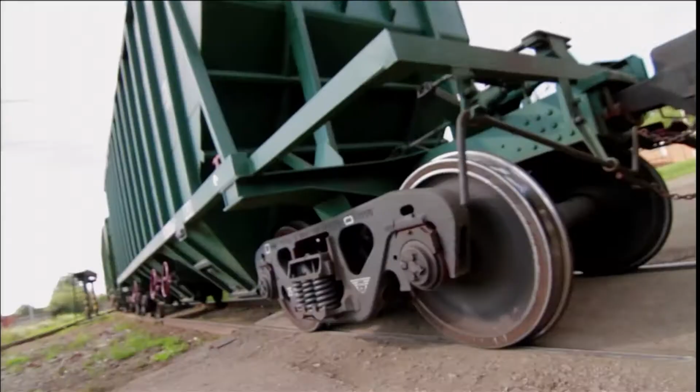Every day, thousands of freight trains wind their way across countries around the world, hauling everything from grain and coal to automobiles and cargo containers. Shipping by rail is one of the most efficient ways of getting goods from here to there, and it's been that way for over 100 years.

But the complexity of getting a train to its destination on time at the lowest cost has always been a challenge. Train length and weight, track conditions, grade, even differences between drivers can all play a big part in the speed and efficiency of freight delivery.

And then there's the constant state of change. A sudden thunderstorm can add tons of extra weight to a mile-long string of open coal cars. In uneven terrain, the lead locomotive on that same train could be cruising down a steep incline while the cars in back are struggling to climb it. In between, a powerful slinky effect of stress can produce enough force to break the train in half.

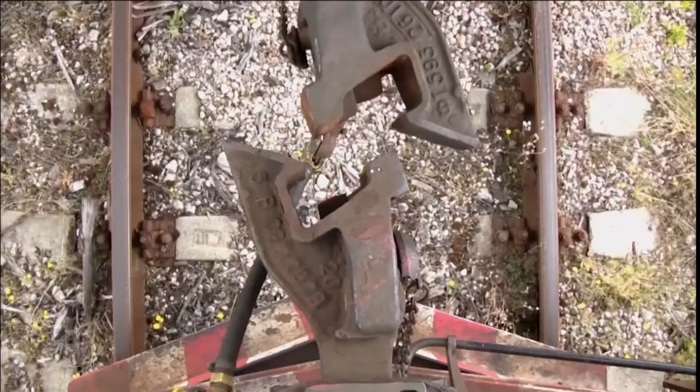It's all about applying the exact amount of power at the exact time to control speed without using the brakes, harnessing the train's momentum to minimize the amount of fuel being burned while avoiding the destructive forces that can cause damage, and doing it while staying on pace for an on-time arrival.

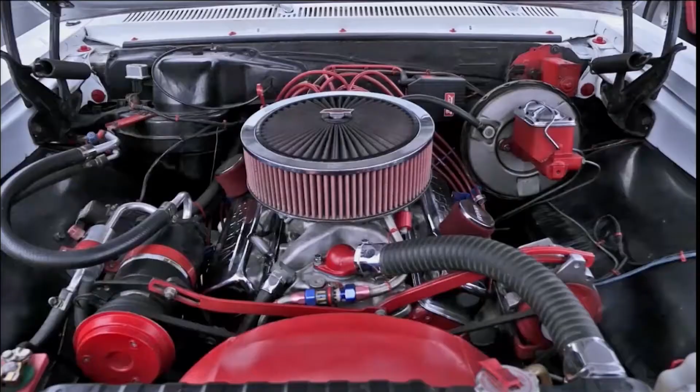It's not easy. The precise application of power is critical to maintaining a perfect speed profile over a route that could stretch for hundreds of miles. Three locomotives can generate over 13,000 horsepower, but on a train weighing 20,000 tons, that's like powering a full-sized car with the engine of a grass trimmer.

You have to think very carefully about the hills and speed limits ahead, and you have to manage your momentum wisely. The smooth ride of a perfect trip can be almost impossible to achieve, even for the most experienced drivers.

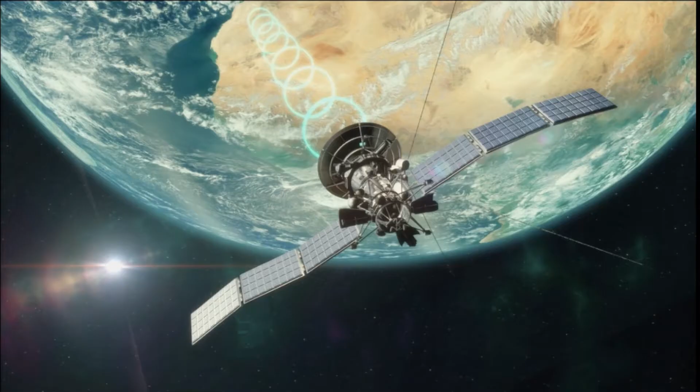But the scientists at GE's Global Research Center have applied their brainpower to the challenge of giving freight trains a brain of their own. Trip Optimizer is an advanced system of software, sensors, and controls that uses technology to push the limits of efficiency to new levels. It's like a smart cruise control for trains, expertly setting the best speed for each point along the route, looking ahead, analyzing a steady stream of data, and automatically making the right adjustments.

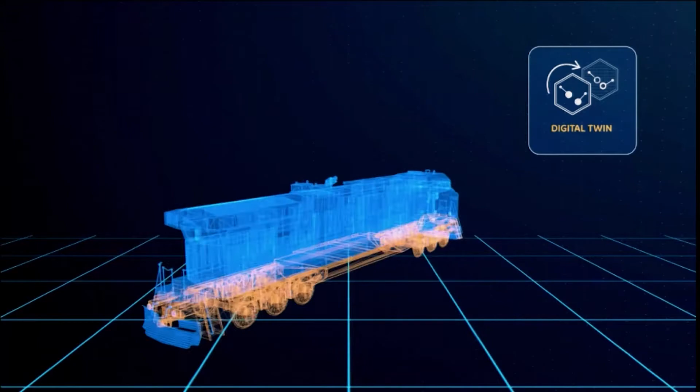Trip Optimizer starts by creating a mathematical model, a digital twin of the train and its trip, to predict the behavior of the locomotive and its cars along the way. It considers things like overall route, desired travel time, weight of the train, speed limits, and changes in terrain. Trip Optimizer even reacts to changing conditions caused by the weather.

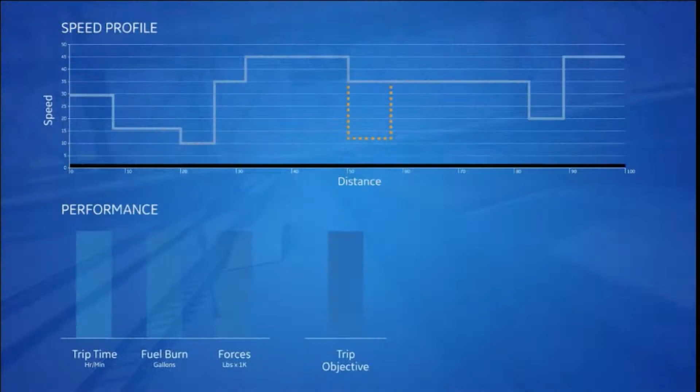Then it calculates the best plan to complete the trip on time using the least amount of fuel and minimizing the coupling forces between cars. Leaving the yard, the system takes over and automatically drives the train according to the plan.

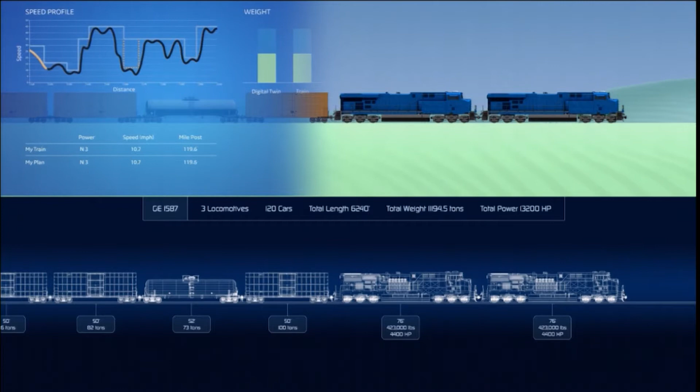Every tenth of a second, Trip Optimizer collects data from a complex network of computers and GPS systems, comparing real-time behavior against the digital twin model. If there's a variance between the two—things like speed, horsepower, weight, position on the track—the system sees it and reconfigures the twin to match, calculating a new best plan based on current conditions.

Trip Optimizer is currently deployed on thousands of locomotives around the globe, including non-GE brands and models, and the results have been nothing short of amazing. In an industry where a 1% bump in efficiency can save 40 million gallons or more of fuel each year, in North America alone, Trip Optimizer is driving improvements up to 10%. Worldwide, that translates into billions of dollars in reduced fuel costs and millions of tons of emissions kept from entering the atmosphere. And it's just the beginning.

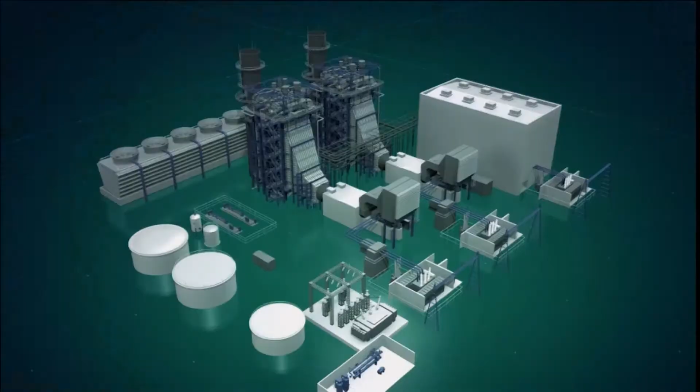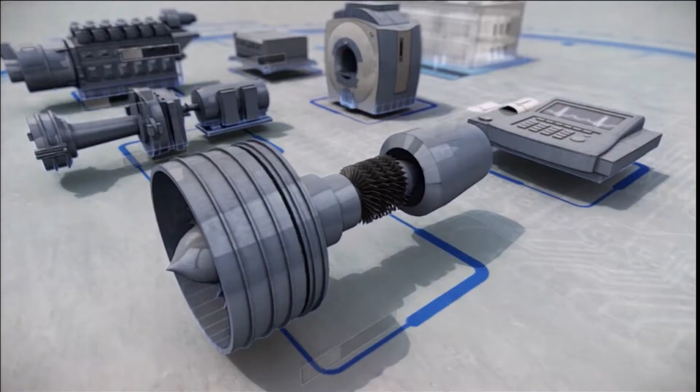Commercial aircraft models are being combined with route calculations to optimize the use of airspace, minimizing costly and annoying flight delays. And power plants are optimizing their output and revenues against maintenance needs and part life to be more profitable. It's all part of GE's mission to transform industries by connecting the physical and digital—sensing, predicting, and responding to make the world work better. And Trip Optimizer is one very good example of that mission in motion. All aboard.

So I thought that may be a fun way to really segue from a lot of the discussions we've been having so far, that are based in the consumer world and the financial world, to really heavy industry. And we'll talk more about Internet of Things throughout the rest of the day. So the idea of something that's a 100-year-old industry—you can see it's really not sexy.

We try to make it look as sexy as possible in this video, but it's really not a sexy space. They don't really like to invest a lot of capital. It's certainly not where you'd imagine there to be a lot of high-tech computing power on board. But it's very interesting that you can change so much and increase the value of your assets so much with just a software change—just changing the behavior of your assets.

So the idea of how do we harness this across industries requires a platform. This was one of our first big technologies that we deployed, really a digital technology in our industrial space. But developing that application, deploying it to all the locomotives, keeping up with all of the software updates—that's something that is going to be much easier to do as our platform emerges, rather than these one-offs.

We've heard GE talking a lot about our industrial internet vision, and I think the rest of the world talks about it maybe more in terms of Internet of Things, but really this feeds into that. We need the platform essentially to realize this vision. And I think, maybe most simply put, the vision is taking digital technologies and applying them to the physical world—especially the industrial world—and extracting value, extracting productivity, whether it's cost productivity or other ways to look at value or performance. When we first started this journey, our CEO at the time, Jeff Immelt, really talked about this in a very similar way that we talk about the consumer internet.

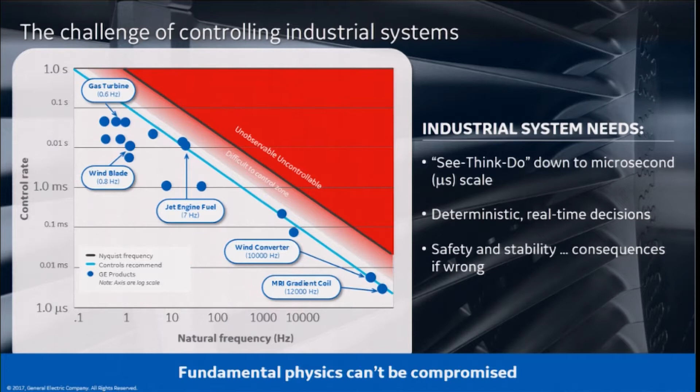Now remember, the old version of how we thought about the industrial internet was very cloud-centric. There's no room in that loop to send information from a sensor to the cloud, perform analytics, make a decision, send back the decision to change an actuator, open a valve, move a turbine blade. There's just no time. So this has to be at the edge.

We're starting to see that physical limits, real substantial blocks, keep us from operating like the consumer internet world standard—Siri in the cloud, making decisions in the cloud. Everything can be in the cloud, except not when you're doing industrial work. Most of the time your physics keep you from following that same path.

So one of the things we did, in the last 7 months my team at the Research Center developed what we're calling Edge OS. It's very similar to iOS or Android OS—it's the operating system that sits at the edge, except instead of sitting in your phone, it sits in your control system of your asset, or in some cases it's the gateway. It doesn't need a control system.

It's this software stack that's developed on a secure hypervisor—that's the block along the bottom in gray. That allows it to talk to the real-time controls, which is the see, think, do loop of managing that asset. But it's safely and securely connected to these cloud-sent applications that are containerized, so it's scalable—you can download a lot of different apps. It's software defined, even the real-time controls is software defined.

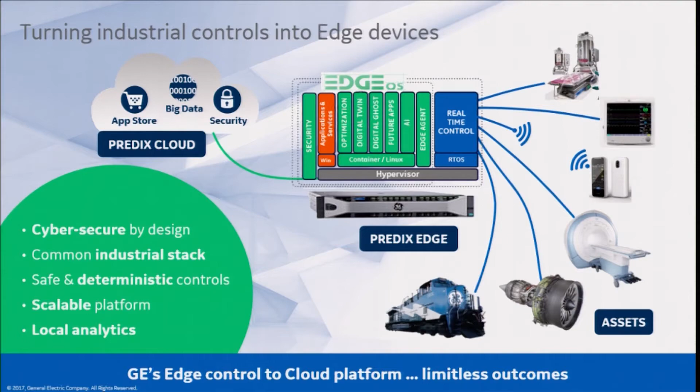This is really the piece that we added. We've had our Predix platform for several years, you've probably heard GE talk about our digital industrial future, our transformation, and our Predix platform. Up until last year it was very cloud-centric. Now we have the cloud-to-edge platform built, and this missing piece we just brought was this Edge OS.

I want to showcase back to that example in the video, the trip optimizer. This is how it works in the platform now. We still have all those digital twins—the mathematical models, the representations of the train and the tracks and all the information we already have based on our physics. But now that's built into this app called Trip Optimizer, downloaded to the control system onboard the train, called GoLINC. That just happens to be the name of the controls box, and it runs on the train.

And now it's not the only thing we're doing digitally with our diesel locomotives. We also have apps that run in the cloud. Those apps might manage the movement planner or yard planner, two really great applications. Those are mostly fleet-based, not single train management.

I'll show you one other example, which is very similar—you can see the platform at work has got a lot of common themes. This one is for a power plant, called Dispatch Optimizer. The common theme is that just like we had the digital twins of the locomotive, here we have a digital twin of the gas turbines, of the steam turbines.

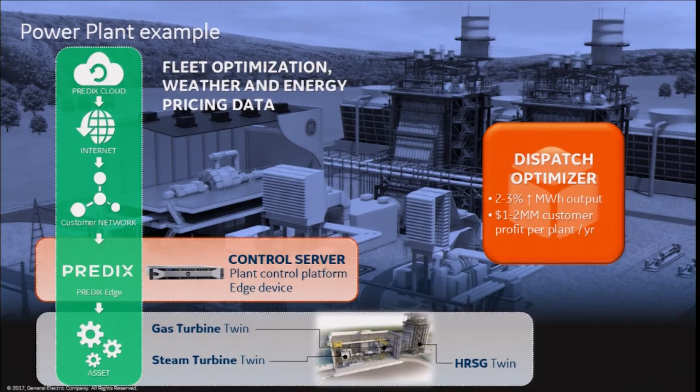But it can look up into the cloud and ask what's the price of electricity today. On a hot summer day when the price is really high, it can decide to operate the system differently and overfire the gas turbine, consuming life much more quickly than planned, but making a huge profit because we're getting paid a lot for electricity that day. On a different day, when the price is lower, it can underfire the gas turbine, conserving life, a little less efficient, but keeping the outage date the same.

No change in service productivity, no change from a plant manager view in terms of scheduling an outage, usually every 3 years. It's a big win. By the end of that 3-year cycle, that plant would have made 2 to 3% more output. That can be a couple million dollars a year. No change in anything physical, no change in service productivity, no change in the outage date, just running the plant differently.

What we found through this process was that it's not just the plant manager we're going to talk to at a customer site, it's the energy trader of that same utility. So it's a completely different relationship now that we have with a customer buying our systems, and not just our gas turbines, but our digital solutions, because of what we're doing to impact that physical system.

I want to show you this technical view of the cloud to edge, cloud to asset view, because the Predix Edge, this Edge OS, is actually a really important link for our security aspect too. Security is really important here because as soon as you tell a plant manager or an aircraft engine provider you're going to start hooking something up to the internet, that gets scary fast.

So what we've done is put this unprecedented amount of checks and balances in place, starting with the hardware. It's that hypervisor, the bare metal of our Edge OS platform. There's a thing called a Trusted Platform Module, TPM. It's a tiny little chip, rooted in the hardware. It's kind of our anchor at the edge, and it provides a fingerprint of trust.

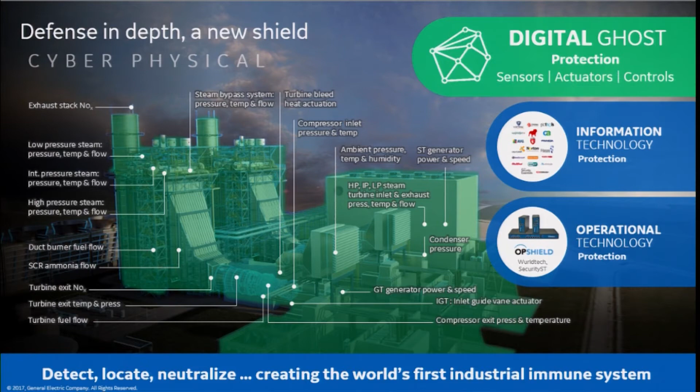So without even a human in the loop, we're now able to detect, locate, and neutralize, effectively creating an immune system in our industrial assets. In fact, one of the scientists on the team who developed this had actually worked in human biology immune activity before. So him coming in and us thinking about how to create these protections was almost too good to be true. That's the great thing about working in a research center that has all these different technologies coming together. You will have somebody who has experience in human biology working on industrial security.

Just to start to wrap things up, I thought I would showcase some of the things we are thinking about now that we're talking about it as a platform, and some of the fundamentals. I won't go into a lot of details because I've talked about how we made it scalable and why it matters that it's safe. But ease of use, it sounds trivial, but as much as we can make this so easy that our customers can't imagine not using it, for example, plug and play, to set up a power plant, to put in an aircraft engine, to set up an electrical yard, those things take time.

If we can make it plug and play, which means the sensors talk to each other, everything self-identifies, you plug it in and it knows what it is inherently, we can save 50% of our commissioning time, which for a power plant could be months. We can save 30% of our engineering requisition costs and time. These are big, big numbers when it comes to these industrial costs.